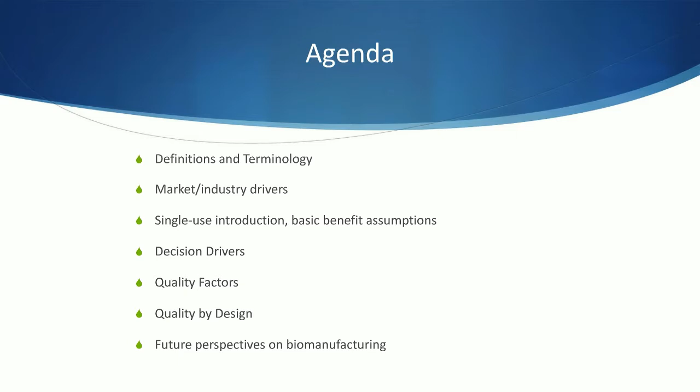This webinar is going to be focused on biologics processing, or bioprocessing as it's commonly called. It will look at the market and industry drivers for selection of suitable bioprocessing systems, and it will also look at the quality factors. This slide shows our agenda for today. We plan to speak for about 25 minutes each and allow about 20 minutes for questions. By the end of this webinar, we hope to achieve these learning objectives. If we don't cover a particular aspect that you're hoping to hear about, we don't want you to be disappointed, and we can cover it in the questions at the end.

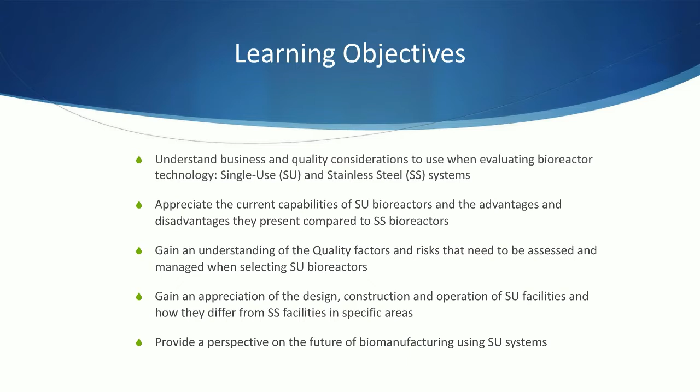We are seeing a growing requirement related to integrated process solutions, meaning a shift from equipment or unit operation-centric solutions to a more comprehensive, process-centric solution. There is a demand for new production and purification methods for many of the new emerging therapies. Data transparency and availability is becoming essential to manage a broader supply chain, particularly for those associated with single-use technologies, and also for extracting the most value from the bioprocess itself and achieving operational effectiveness.

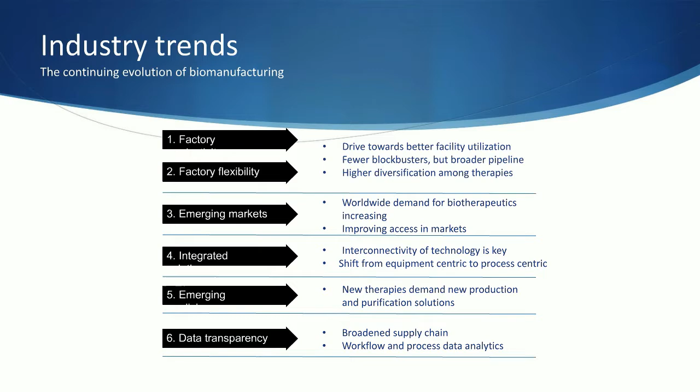These drivers boil down to three primary elements: drivers that address patient and shareholder values, increasing drug success rates, reduction in time to market, and keeping production costs as low as possible without sacrificing quality.

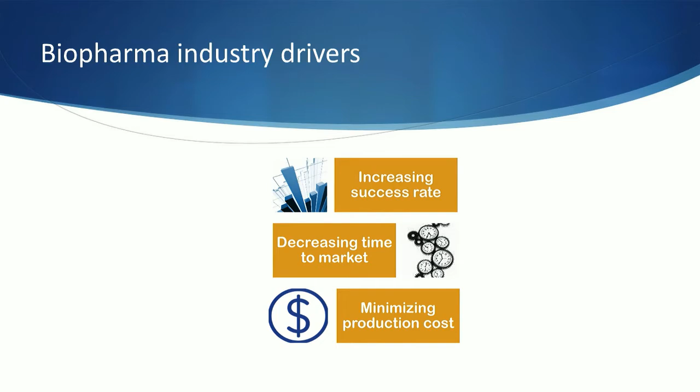Single-use technology, including single-use bioreactors, helps improve productivity by becoming more flexible and capable of supporting multi-product manufacturing more easily, which increases utilization rates. New processing methods, such as process intensification and continuous bioprocessing, have the potential to increase those rates even further.

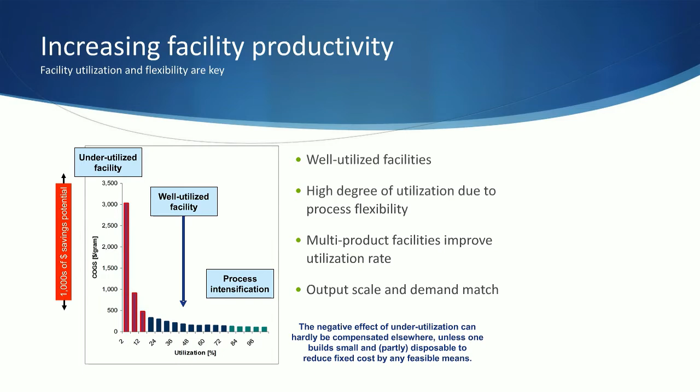For our discussion today, we want to outline the type of manufacturing scenario we'll be referencing. It's a manufacturing scale, either clinical or commercial, in a greenfield facility, not a retrofit. Stainless steel bioreactor capacity to 10,000 liters, and single-use to 8,000 liters, comprised of 4 by 2,000 liter single-use bioreactors and conventional downstream. Although we've used this as the representative scenario, much of what we present will be applicable to other scenarios as well, so please keep your particular scenario in mind as we go through this presentation.

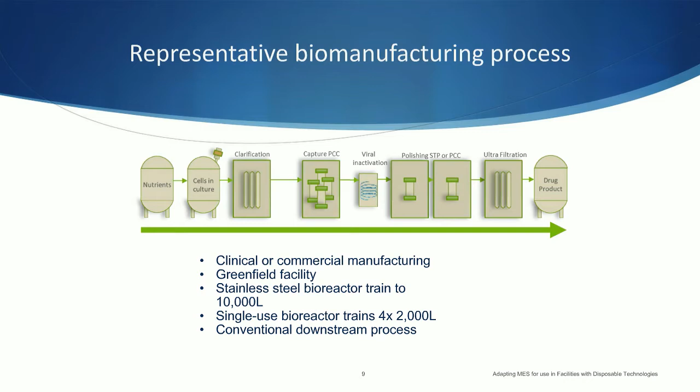Having been involved in stainless steel equipment, including bioreactors, I find it useful to compare the two technologies side by side as shown here. For our scenario today, the two 5,000 liter stainless steel bioreactors on the left and much of their associated piping are being compared to 4 of the single-use 2,000 liter bags and vessels shown on the right.

Let's make 3 key comparisons between the bioreactor types. Manufacturing scale stainless steel bioreactors have been and continue to be engineered to order, customized to meet the unique production requirements within dedicated single product facilities. Single-use bioreactors, on the other hand, are comprised of 2 complementary pieces: the hardware, including the vessel or bag holder, and the bag itself. Single-use bioreactors from the primary suppliers have been built as product platforms. These platforms accommodate changes, particularly in the bag, to address different processes. Change the process, change the bag.

Consumables normally associated with stainless steel bioreactors include inlet and exhaust filters, elastomeric tubing sets, and process probes. Likewise, single-use bioreactors employ similar components. However, the quantity and complexity of the single-use assemblies increases substantially as they become the replacements for the vessel and fixed piping of stainless steel bioreactors.

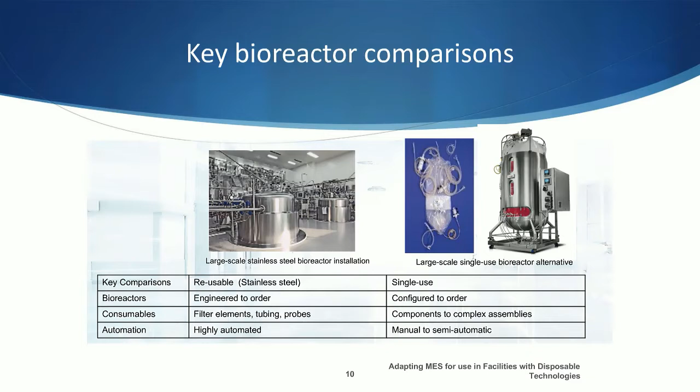Last among the key items, and not to be overlooked, is automation. Automated valves and position indicators are quite common in stainless steel bioreactors. Conversely, single-use bioreactor bags with their ports and tubings rely on manual pinch clamps, which puts more emphasis on the automation platform to guide operators' actions and receive acknowledgement those actions have been taken.

Within the context of Industry 4.0, the digital collection and management of this data is essential in making ongoing improvements.

Now, back to Trevor. Thank you, Ken. Yeah, thank you for setting that scenario and the comparison.

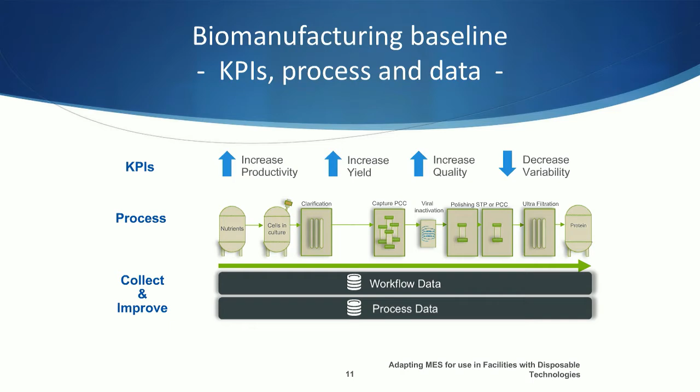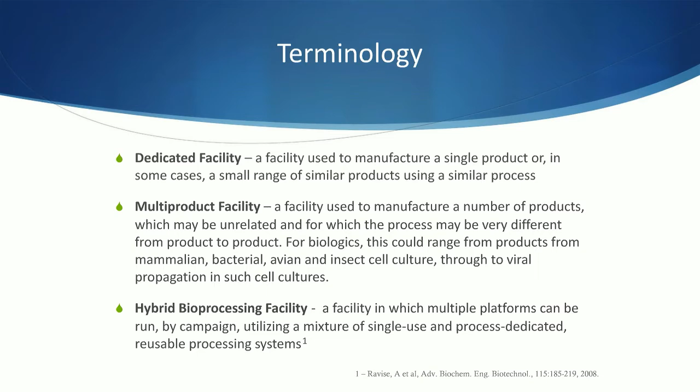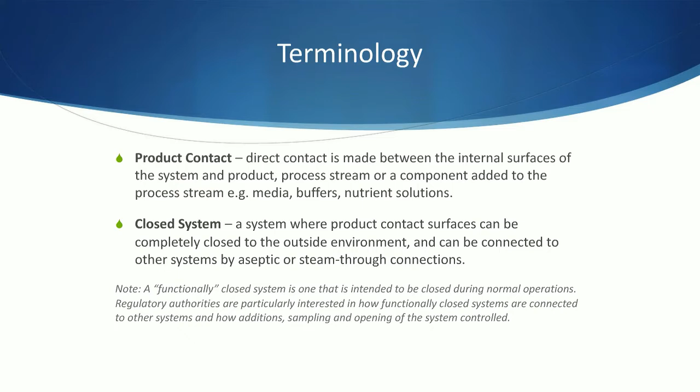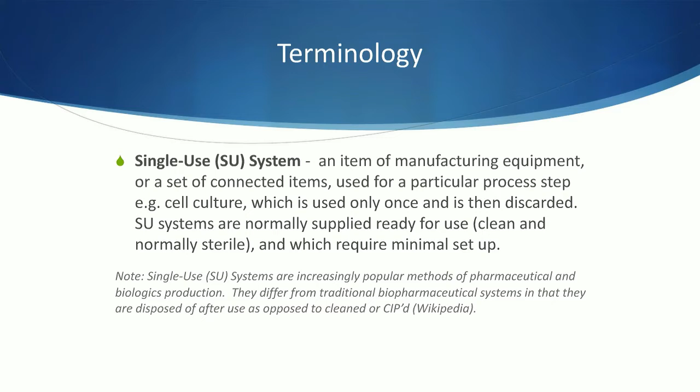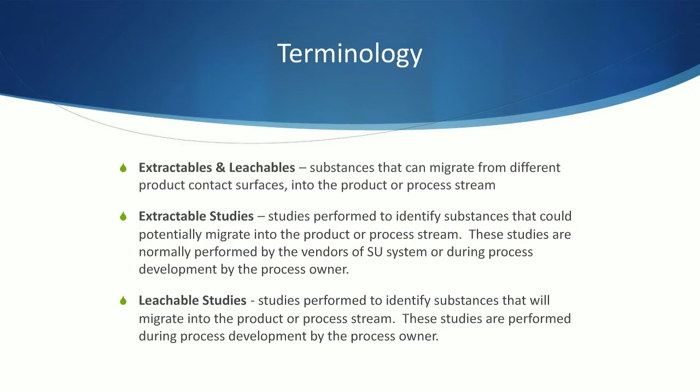We can't afford to ignore quality, and in bioprocessing there's no reworking. Reprocessing has to be strictly controlled and fully validated. I'm thinking of things like refiltration and repeating a chromatography step, which are both considered as reprocessing by the regulators.

Bottom line, there's very little room for error in bioprocessing. If you make a mistake, it can be costly. For example, if a cell culture gets contaminated, the batch must be discarded.

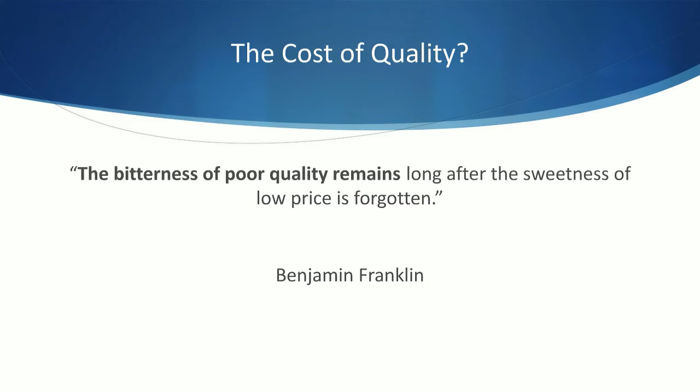So it's worth taking a look at the historical situation before the explosion of single-use technologies in bioprocessing. At the beginning of the millennium, the only single-use systems in common use in GMP bioprocessing were disposable filters and bags for buffers. Sometimes these disposable filters were used multiple times, such as air vent filters and sponge filters, which could be used on multiple occasions.

100 litres was considered about the smallest scale for mammalian cell culture for phase 1, the first point at which you need GMP material. Quite often, the process had to be scaled up for phase 2, and then again for phase 3 and commercial production. By the time you get to phase 3, you should be at your commercial scale.

The result was stainless steel bioreactors with many feet of piping, supplying water, gases, and nutrients, supported by extensive media and buffer preparation facilities and storage plants. These facilities were often dedicated because of the regulatory hurdles required to show decontamination and the time taken for product changeover. They were uneconomical, requiring a lot of risky capital investment at a very early stage of product development, when companies don't want to spend that kind of money.

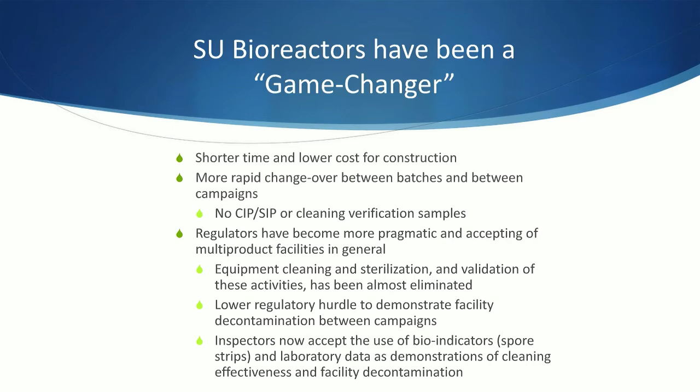In order to make a well-informed decision about system selection, we need to do some very early assessment of our process. We need to know that the process can be run and is scalable in the system we wish to select. Not all cell lines can be propagated or will express protein in single-use systems. So some very early design of experiments is needed, and it's something that most companies don't think about till at least phase 2 -- they don't want to spend money on design of experiments at phase 1. But the extent of the process understanding needed at this early stage is nowhere near as great, and it is essential for the selection.

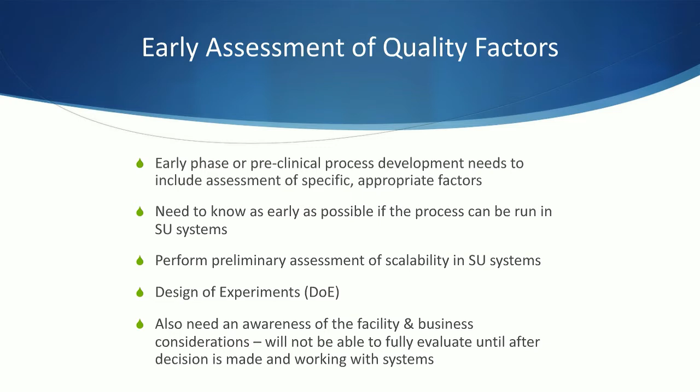It's time and money that's well spent, and it can result in a much greater cost and time saving if a single-use system can be used instead of a stainless steel system. So let's look in more detail at quality by design as it applies to the selection of single-use systems.

Oh, sorry, rushing ahead.

The cell culture process needs to be well controlled to ensure the best yield and the best product quality. It's well accepted that the control of critical process parameters is far better and more established in stainless steel systems than in single-use systems. With stainless steel systems, it's quite normal to have more mixing, aeration, and temperature control capacity than is needed. More work is required to evaluate single-use system capacity and capability, but the technology is improving, and with the development of jacketed single-use bioreactors and improved agitator design and sparging, it's starting to happen.

Either technology will allow pooling of the harvest from multiple bioreactors, and this allows scaling of the downstream process without having to change the upstream process. However, remember, stainless steel reactors require a much larger footprint, and for these systems it's much more efficient to increase the size of the bioreactor rather than the number.

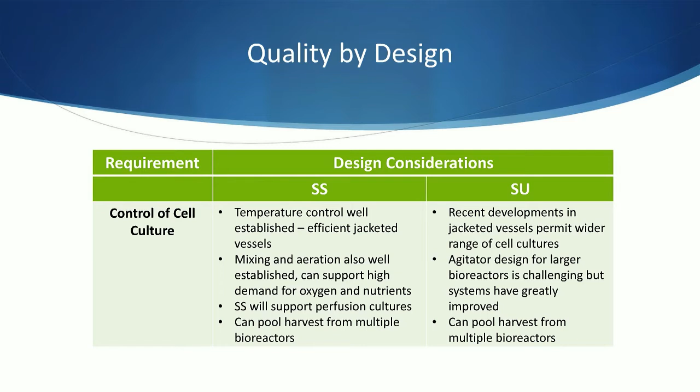Single-use systems offer almost no opportunity for cross-contamination. This isn't the case with stainless steel systems. In stainless steel systems, there are more opportunities for microbial contamination and inefficient cleaning. These include large piping runs that have bends and dead legs, elastomeric seals to which proteins love to stick, and tanks that have spray ball blind spots. Spray ball coverage is an important criterion for qualification of stainless steel bioreactors and tanks.

As we've already discussed, the greatest contamination concern for single-use systems is loss of integrity between leaving the vendor's warehouse and being assembled in the clean room ready for use. Integrity testing in situ is therefore of vital importance.

And on that note, I'm going to hand back to Ken.

All right, thank you, Trevor, for that discussion on quality by design. Let me get to, here we go.

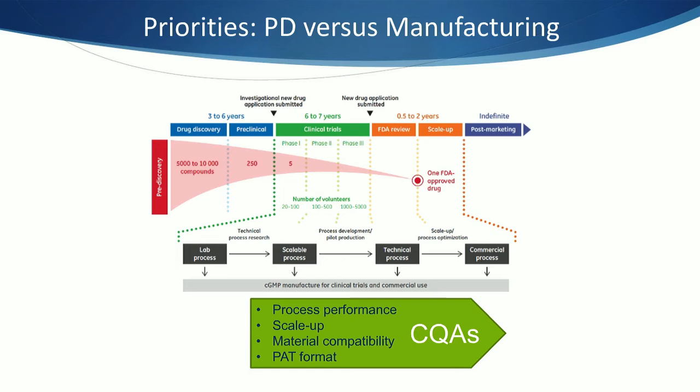Although this list may not be exhaustive, it does provide an excellent universal framework upon which to build a body of knowledge necessary to construct bioreactors of either type, stainless steel or single use.

Scale-up evaluation can be addressed using process modeling and simulation as well as actual small-scale process runs. The relationship between physical system features such as impeller diameter and type, sparger location and type, can be associated with specific performance parameters like power per unit volume, power number, mixing times, and mass transfer capacity. Using bioreactors of the appropriate sizes, the model simulations and relationships can be confirmed with trial runs in process development.

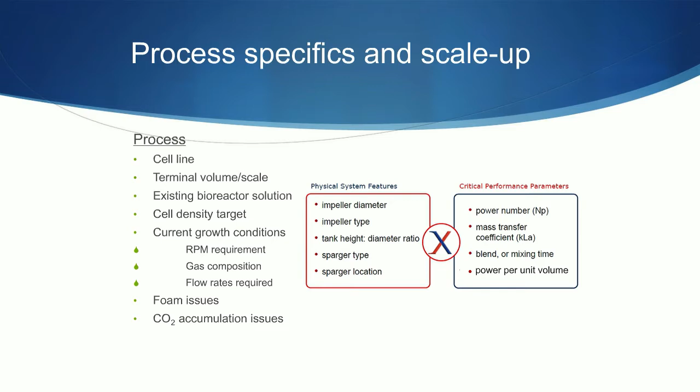Single-use bioreactor suppliers have expended much effort and expense to create product platforms capable of addressing the broadest possible range of cell culture processes. The bioreactor hardware and the bioreactor bagware must work in concert in order to perform in a way that is analogous to a stainless steel bioreactor.

Two design spaces exist, one for the bag and one for the hardware. The bag design space includes the film, weld-on ports, tubing, agitator drive interfaces, sparging elements, filters, and other similar bag-attached components. The hardware design space includes the vessel or bag holder, process measurement instrumentation, mass flow controllers, pumps for liquid management, exhaust filters, and condensers where applicable, among other things.

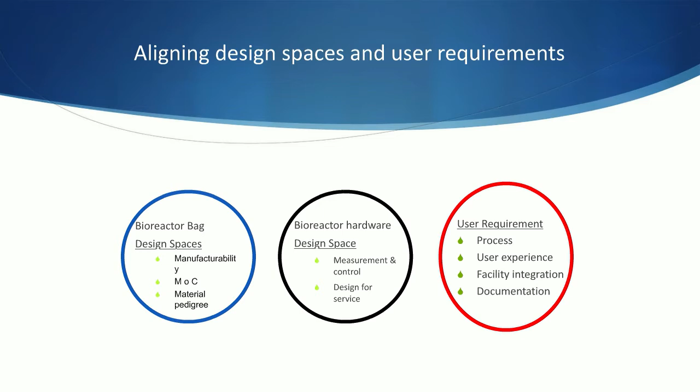The regions labeled D define what from the user requirements is not being met, and understanding this alignment is essential.

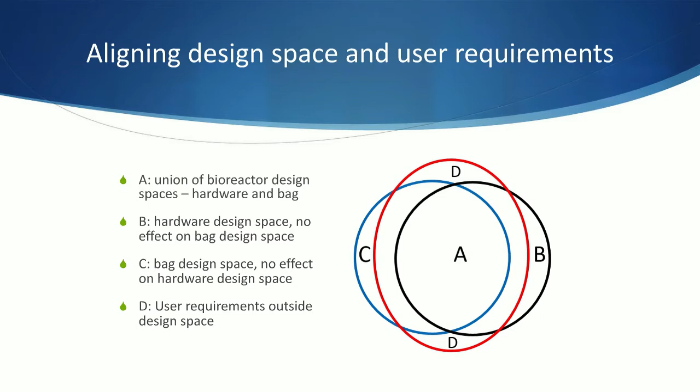With stainless steel bioreactors, there's a well-established body of knowledge about the common alloys used and their various forms, such as tubing, valve bodies, sheet material for vessel walls, etc. For such bioreactors, we have relied on metallurgists, and the lexicon has been defined by such terms as corrosion resistance, chromium layers, passivation, and rouging. Supply is ubiquitous, nearly universal, and distributed, establishing independence between bioreactor supplier and buyer.

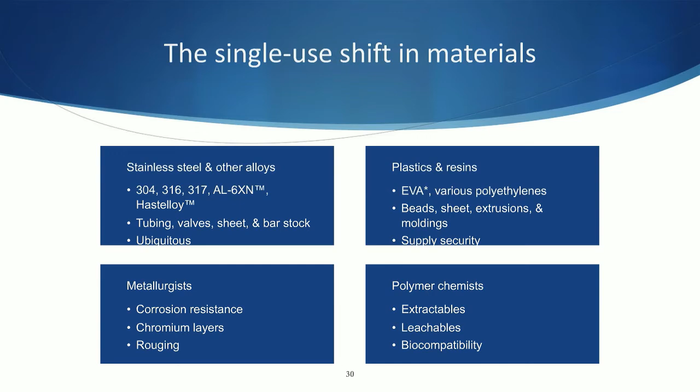In single use, however, we now talk about plastics and resins, and by analogy, plastic forms that include beads, sheets, extrusions, and moldings. Polymer chemists have taken the place of metallurgists, and extractables, leachables, and biocompatibility define a new lexicon. Unlike stainless steel, single-use security of supply takes center stage because of how sourcing and the supply chain is structured. Single-use assembly suppliers and buyers are linked as never before. Biocompatibility and supply must be considered early in the technology evaluation process.

Understanding which measurements are not required at the manufacturing scale is equally important. This is true for both stainless steel and single-use bioreactors.

Single-use bioreactors introduce a new probe or sensor form factor, that is, sensors that are welded into the bag and gamma irradiated as part of the bag's manufacturing process. These are ready to use and do not require autoclaving or insertion, unlike their reusable counterparts. In some cases, these weld-in sensors employ sensing techniques that may differ in range, stability, or accuracy from their reusable equivalents. These factors must be considered when deciding which sensor type to use.

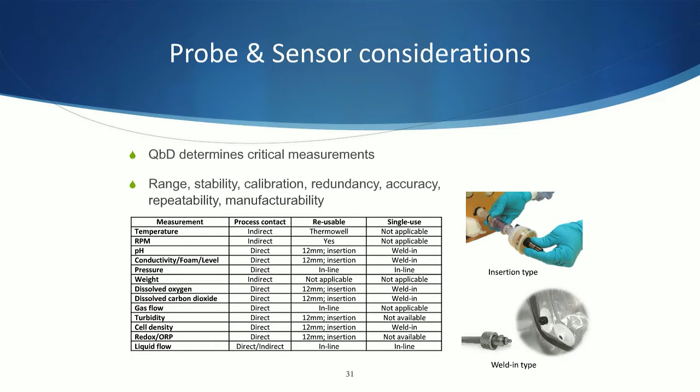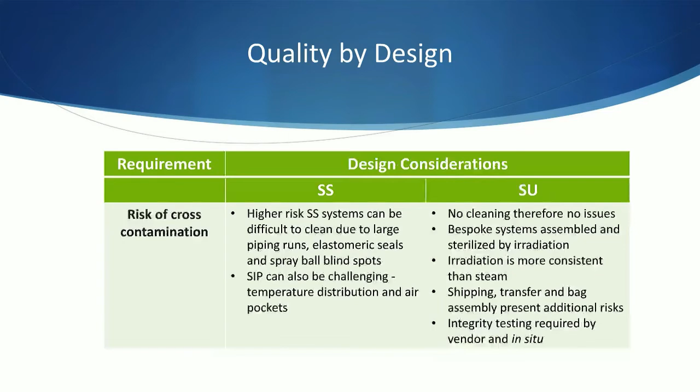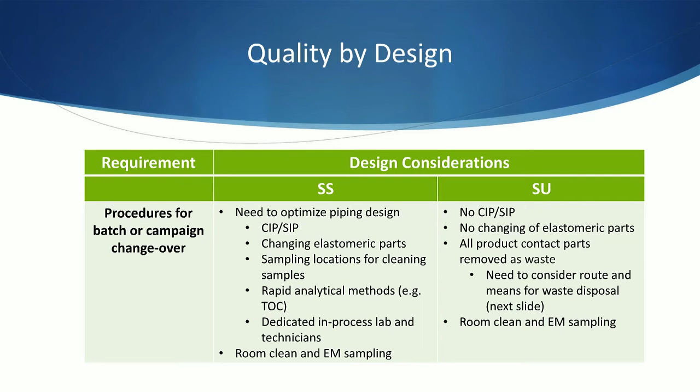However, for single use, one of the big considerations is removal of waste, because there's a lot more waste. And that's covered on this next slide.

In order to minimize the risk of cross-contamination due to waste disposal, the waste disposal procedures need to be qualified. You can't really validate them, but you can qualify them and control them. This is becoming the industry norm, and regulatory inspectors will expect it.

For stainless steel systems, the validation challenge is generally simpler. The main concern is liquid waste, which is run to a kill tank and then decontaminated by heat treatment. It consumes power, but it's controllable.

For single-use systems, the bag needs to be taken out of the clean room and either autoclaved before sending for incineration, or simply bagged up as hazardous waste and incinerated. Autoclaving requires validation, and if the bags are large, with large agitators, the autoclave needs to be large.

Removing hazardous waste is much simpler, so simply bagging it up as it is and taking it out the clean room straight to incineration is by far the easiest way to get rid of the waste.

However, whether the bag is autoclaved or not, there needs to be a unidirectional flow of materials into the clean room and of waste out of the clean room to avoid the potential for cross-contamination. Unidirectional flow requires a larger clean room footprint, but it's strongly advisable because it's much easier to control and qualify.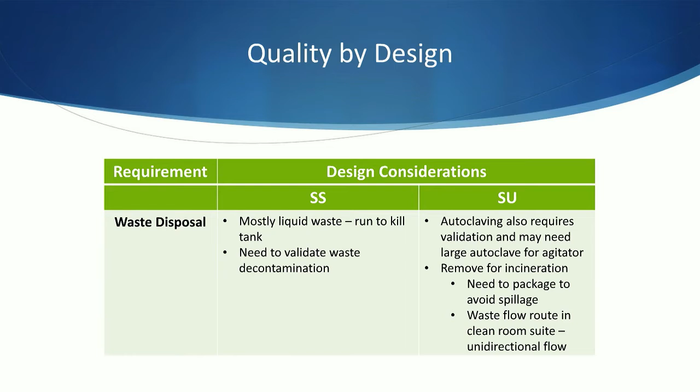Leachables from stainless steel systems are not generally considered a risk to product, although stainless steel systems will rouge and passivation is needed during commissioning and periodically thereafter.

Main concern for stainless steel systems is clean in place reagents. There's also a risk that these can cause inhibition of microbial cell cultures. Therefore, the validation of the CIP cycle has to also demonstrate that the rinsing will remove cleaning reagent residues.

For single-use systems, we need to understand what is going to leach into the process stream. And as has already been mentioned, this is a job for the process owner. We need to understand what the impact of those leachables might be on cell propagation and protein expression.

At this stage, we are far less concerned about the leachables getting into the final product. But during downstream processing, we need to understand the toxicity risk of the leachables if they do carry over into the final product. We also need to understand if they will interact with the product and impact product stability. All of this is part of the early phase design of experiments that we referred to earlier, and it's essential prior to selection.

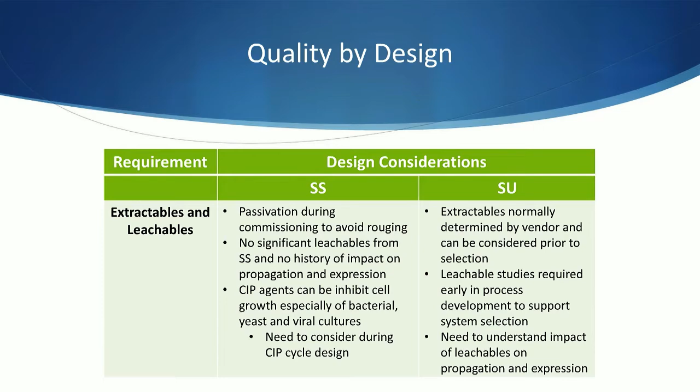We'll go back now to where we should have been when Ken finished speaking. Oh, here we go.

So now let's compare some of the business considerations between stainless steel and single-use systems. Cost is always important, and the comparison here is between high capital costs for equipment and utilities, qualification and validation of stainless steel systems, and the high cost of usage of utilities as compared to the high cost of disposables for single-use disposable systems. The bags themselves are expensive.

There are many cost comparisons in the literature. They include comparison of bag changeover times and other factors, but none of them that I'm aware of has included a comparison of speed to market, and that is a very important cost consideration. Time is money. You can get to your first GMP batch and scale up far more quickly using single-use systems. You can save valuable time when developing new products.

The smallest footprint of the single-use systems also provides significant cost benefit. Single-use systems are clearly more flexible, primarily because you can run multiple types of cell lines and scale up all in the same suite on a campaign basis. So you don't need as many facilities or as large a facility.

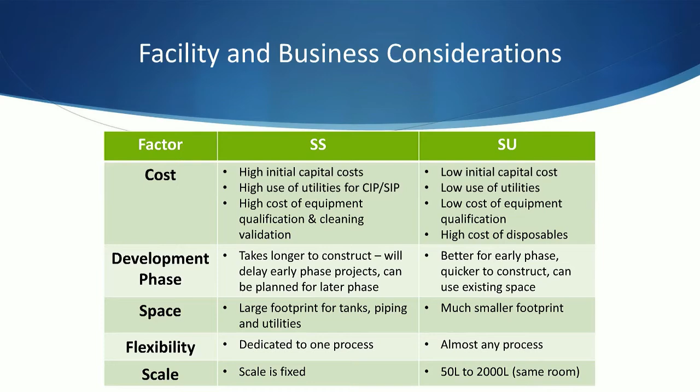So we've talked about quality by design, but this slide provides a high-level comparison of the quality considerations for single-use and stainless steel systems. Bioreactor integrity is one of the most important quality factors, and the methodology for demonstrating bioreactor integrity in stainless steel bioreactors is far better established. We can assign very tight acceptance criteria for pressure hold tests. If the bioreactor is well sealed, it can hold a high pressure for a long period of time.

Bags cannot be pressurized to the same extent as stainless steel tanks, and the sensitivity of the pressure decay test is limited. Pressure losses do occur over time, even with intact systems, and each system configuration needs to be evaluated to determine what the acceptance criteria should be.

Vendors are responding to customer and regulatory demands for better defined methods, and there are some custom solutions out there, and the sensitivity is improving. This is something that you should discuss with the vendors and see what they have to offer. There's also a guidance document on single-use leak testing, and it's currently being developed by the Bioprocess Systems Alliance, which is an interesting body worth looking at.

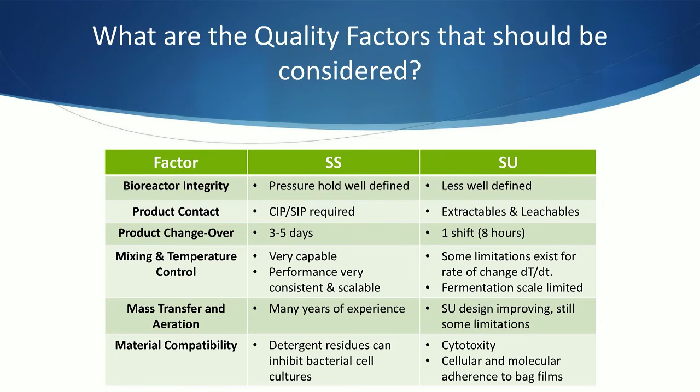Here are some further additional quality factors. The requirement for cleaning and sterilization comes up as a consideration again and again, and we'll expand on this later. The clean room design is heavily influenced by what needs to go into the clean room, and also by the type of operations that occur in the clean room. The clean room design for single-use systems is much simpler and less extensive, which is why it's quicker and cheaper to construct.

The probes and sensors that are used in the stainless steel system are not practical to use in the single-use system. Therefore, probes and sensors need to be specifically designed, and we've already heard about that from Ken. There's less experience with these instruments. They can be calibrated offline in situ, but they are different, and they will have some influence on the process control parameters. You cannot just simply transfer a process from stainless steel to single use or vice versa and expect that the measurements you're going to get are the same.

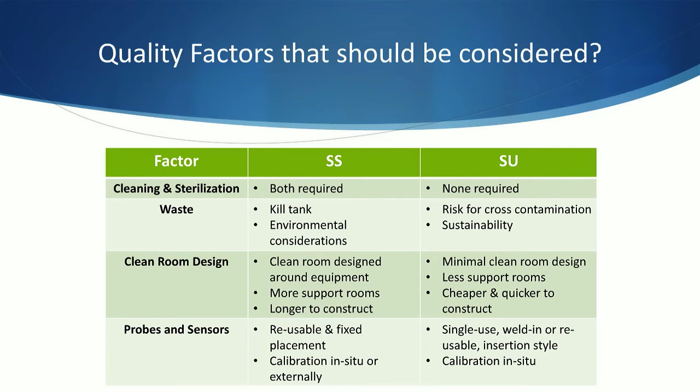There's an argument here for not changing between single use and stainless steel and just sticking with whatever system you've got and scaling up. Although I would argue that sticking with stainless steel is going to be a more costly option.

So that said, I'll hand back to Ken.

Good coverage on facility and business considerations, Trevor. Thank you. I'll continue here with some specific examples.

There are a number of technology-based changes associated with the facility, many of which Trevor introduced or discussed just a minute ago. And as this comparative representation depicts, the facility's footprint changes due to changes in bulk fluid management and the reduction or elimination of CIP and SIP requirements. Less obvious, though, are the changes in material, personnel, and waste flows throughout the facility.

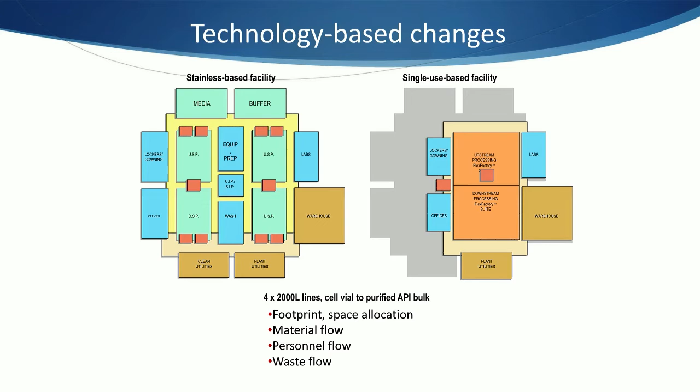Specifically related to single-use implementation, materials management, batch record composition, bioreactor integrity testing, as Trevor mentioned, and operation are highlighted here as specific areas to consider.

Material management is listed twice, once at the warehouse level, where bulk single-use assemblies are received from the supplier and stored. The second time relates to pre-manufacturing staging of the assemblies at or near the point of use. Batch records can also be considered part of material management, since the traceability of single-use components and assemblies is accounted for in the batch record, including rejected or failed assemblies and their replacements or substitutes.

For integrity testing, it will be critical to consider the value such testing might add, the size of the sample set necessary to establish relevant results, and the complexity of measuring temperature-dependent pressure decay in a container with elastic walls.

Operational automation considerations, where single-use assemblies are involved, relate to ensuring operational readiness and continuity, particularly where operator intervention is required.

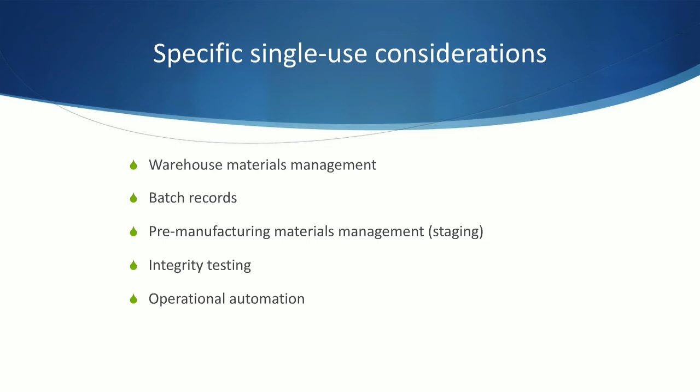Sourcing and procurement business functions act as the middleman between internal stakeholders like manufacturing and quality assurance and the suppliers in the supply chain. Sourcing and procurement must focus on supply security to properly support the internal business stakeholders.

The warehouse represents a transient location for single-use components and assemblies. The warehouse space allocation and residence time are dependent on how well supply and consumption rates are aligned and how risks will be mitigated using contingency planning. Contingency plans may include inventory levels, supplier-held inventory, as well as looking for alternative or backup suppliers where applicable.

Production planning dictates consumption forecasts, and consumption forecasts influence supplier lead times. Throughout this interdependent interaction, the security of supply must be robust and the chain of traceable material pedigrees must be unbroken. Linking materials in the warehouse to usage in the batch record comes down to how effectively the single-use life cycle is managed in the enterprise resource planning system.

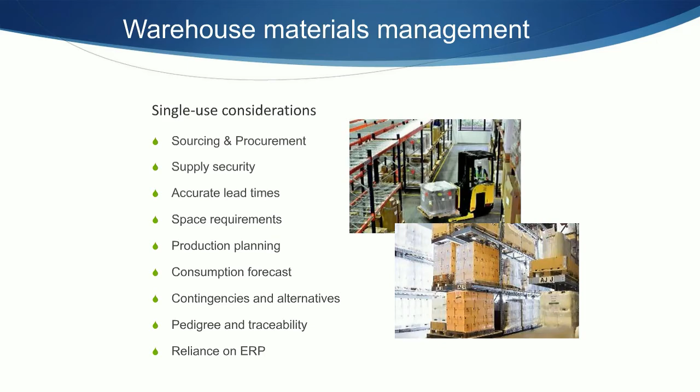To get an idea of the impact single-use products can have on building the batch record, here's an example of a single component. In this case, a filter cartridge sourced from multiple vendors.

The component document packages must include the same core content categories, such as material certificates, test results, and drawings. Within these records, however, the layout and presentation of the information may vary from supplier to supplier. Available formats and delivery mediums may include human and machine-readable options. Understanding what the suppliers provide and aligning that with your information management methods is a critical consideration for success.

For human-readable items, specific training may be required to avoid misinterpretation of variable content and layout between these types of documents. In all cases, however, linking the records and their information to the component item master within the enterprise resource planning system helps ensure accessibility, consistency, and compliance.

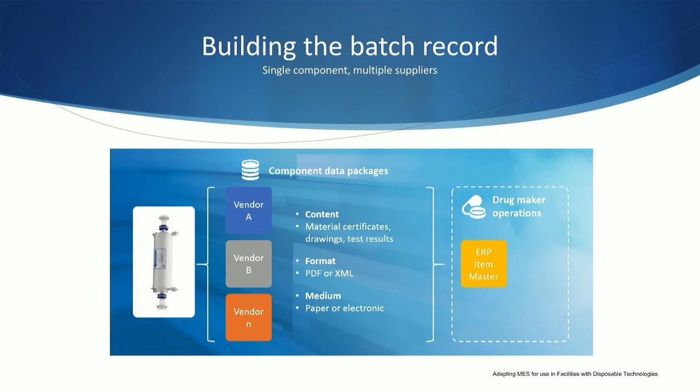Continuing to build the batch record concept a little bit further, here's a practical single-use bioreactor example. This includes components like we saw in the previous slide, plus single-use assemblies such as tubing kits, used for process connections between bioreactors or to bulk fluid management equipment. All the same comments about component data packages, content, format, and delivery mediums apply here too.

In this example, the situation is compounded by quantity and complexity of the assemblies. Dealing with rejected, failed, and substituted components and assemblies at the point of use impacts the manufacturing process tremendously. A proper, thoughtful consideration of contingency planning and the information management associated with this material flow is an essential part of the single-use life cycle management.

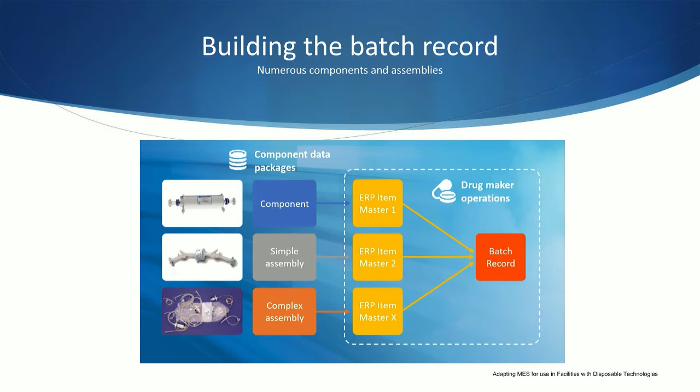Staging for manufacturing. Warehouses are rarely a good place to unpack and store unprotected single-use components and assemblies. Staging for manufacturing at or near the point of use includes many necessary steps, starting with unpacking.

After unpacking, temporary storage can be used to allocate and sequence the assemblies. The inspection step is performed to reduce the likelihood of certain visible defects making it onto the manufacturing floor. Visual inspection criteria should be guided by the supplier's knowledge of the product, specific operator training, and experience gained by the drug maker's operations staff over time.

The last step in the sequence is loading the bioreactor bag itself. Here are examples of top-loading bioreactor bag to the right and a waist-level bioreactor loading on the left.

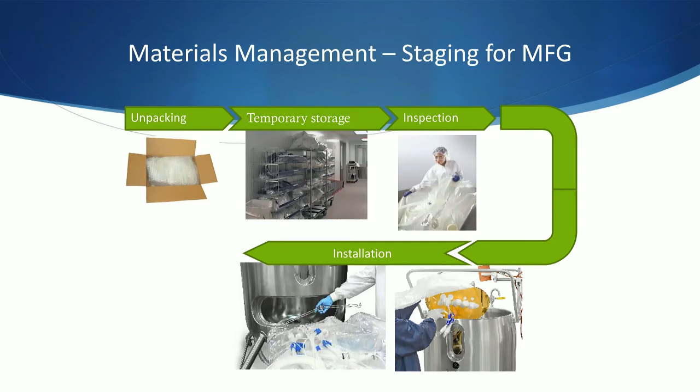Integrity testing is commonplace in stainless steel bioreactors, as Trevor said. It has become an active discussion topic in single-use bioreactors as well. On the left is a typical stainless steel bioreactor piping and instrumentation diagram. On the right, a representative single-use bioreactor P&I diagram. Construction and complexity differences should be clear.

Therefore, it will be important to consider the equivalent effective pressure boundary in the single-use bioreactor when looking to implement some kind of integrity test. And because the film and tubing on the single-use bioreactor bag are elastic, practical test methods must be established to attain useful results. Just like the visual inspection process mentioned earlier, collaboration with suppliers on this topic for recommendation and training is highly recommended. Accumulation of a large enough data set will allow periodic evaluation of the testing's effectiveness.

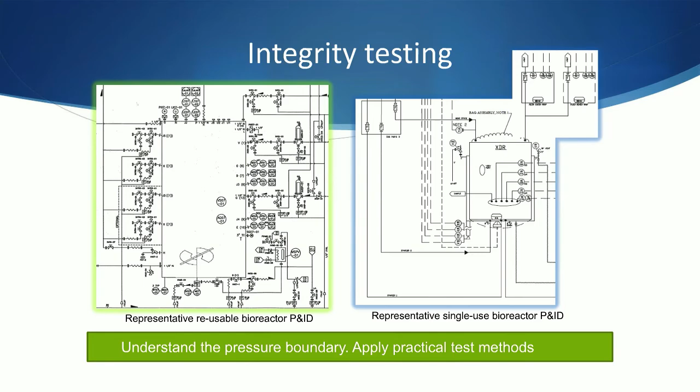Again, using a stainless steel bioreactor P&ID for reference, I've highlighted 4 addition lines and a sampling line. These steam-in-place lines include various combinations of manual and automated valves with weir type and radial diaphragms.

The equivalent line types are present also in single-use bioreactors, but without the valves and especially automated valves. Instead, such lines on single-use bioreactors routinely use pinching devices, and the pictures shown here are examples of typical pinching devices used for single-use assemblies.

Automation applied here to these devices on single-use bioreactors can improve process robustness by displaying procedural guidance, providing user prompts, and accepting acknowledgement that manual steps have been taken.

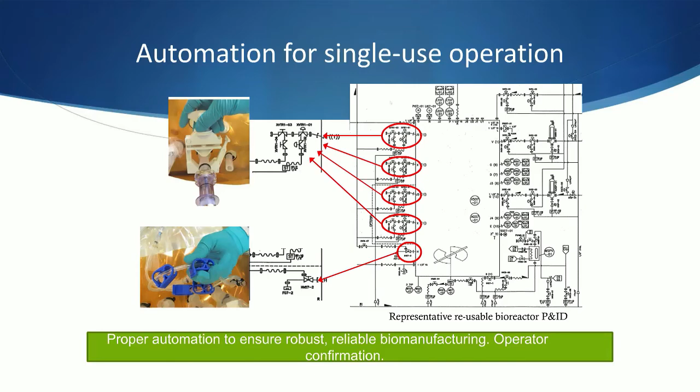To conclude this section, I thought it would be useful to compare agitator seal methods. The left-hand diagram is an excerpt from a stainless steel bioreactor P&ID showing a double mechanical seal. With it, there's a clean steam condensate seal lubrication subsystem.

The component count and complexity are extensive, and besides the high level of maintenance associated with such a subsystem, mechanical seals still do represent a potential bioreactor contamination source.

By comparison, the 3 images at the right show the elements that make up a representative single-use agitator and sealing mechanism. The magnetic drive head within the vessel opening is shown at the bottom. A cutaway of the impeller base placed on top of the drive head is shown in the middle picture.

And up top, a complete impeller assembly with the bag weld flange highlighted in red. That is what actually makes the seal in this case. This is a much simpler design, and it eliminates the contamination risk posed by the other design.

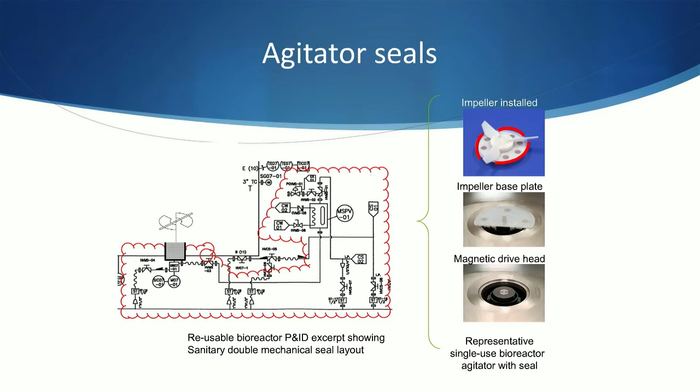Thank you very much, Ken, for describing some of the operational considerations. And now I want to consider the future.

The future bioprocessing facility will be a hybrid facility. It will most likely be a mixture of single-use and reusable platforms. For example, centrifugation still is a challenge for larger scale single-use, but where reusable equipment is needed, it will most probably be product dedicated to avoid the need for cleaning validation product changeover.

The ability to remove all the equipment from the room and fumigate will become standard practice, and clean room layouts will ensure unidirectional flow of people, materials, equipment, wherever possible. Such a facility will be capable of running any type of cell culture that you wish.

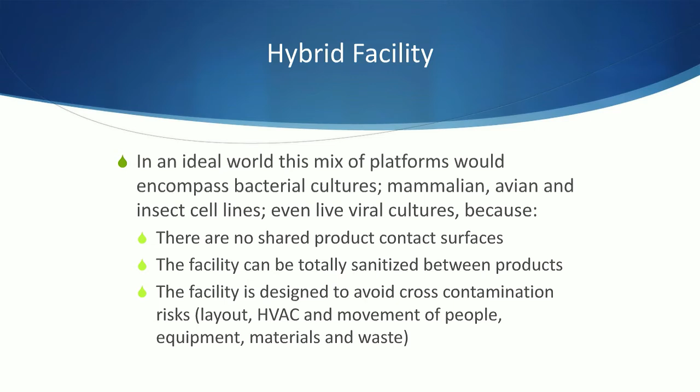The utopian view of bioprocessing is summed up in the next 2 slides. The progress that is being made with single-use systems means that we are moving away from uneconomical dedicated facilities. The meaning of multi-product facility is changing.

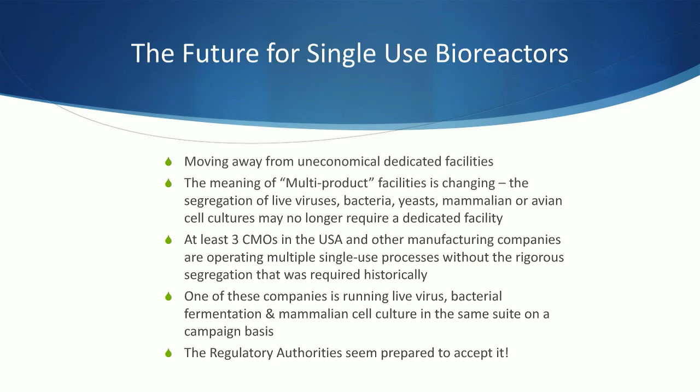At least 3 CMOs in the United States and many manufacturing companies are operating multiple single-use processes without the rigorous segregation that was required historically. One of these CMOs is running live virus, bacterial fermentation, and mammalian cell culture in the same suite on a campaign basis, and the regulatory authorities seem prepared to accept it.

We're now seeing that the flexibility of single-use systems is driving demand. This in turn is driving improvements and is encouraging companies to design larger scale single-use bioreactors. The combination of larger single-use bioreactors and higher yielding cell lines means that it's now possible to go from bench scale to pilot scale to commercial scale in single-use systems in the same facility.

If we can achieve this, we've saved an enormous amount of time and money during process and product development, and some companies have already started to realize these benefits.

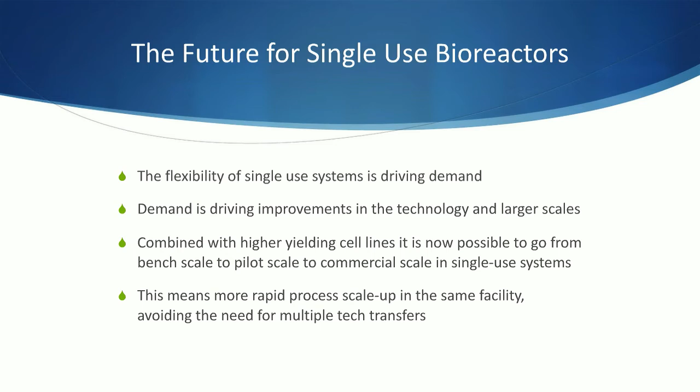Thank you, Trevor. Adding to Trevor's summary, we've covered a lot of material today. The benefits of single-use technology, including process flexibility, reduced cleaning needs, and the near elimination of contamination risk, are all reflected in better process economics.

Sustainability, too, is well accepted now that single-use technologies have been broadly adopted. However, some questions still persist, like standardization of extractables and leachables testing, supported documentation completeness, and how effectively to manage critical quality attributes as part of a single-use life cycle management approach, and what remaining regulatory challenges remain, or will there be, as we push the technology further.

However, we've presented some information we think you can use as you evaluate and implement single-use bioreactors and perhaps other single-use unit operations as well.

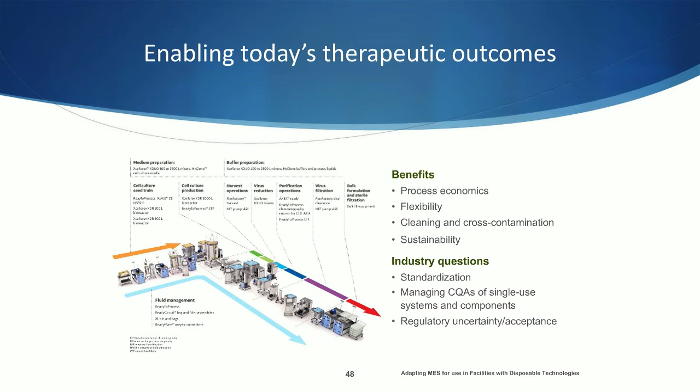Because of the importance of material management in single use, I wanted to be sure to highlight again how single-use technology increases the need for proper, adequate material management to support manufacturing, from the supply chain to the warehouse and from the warehouse to the bioreactor.

And material management is not only about physical logistics. Effective single-use material management must include integrated information management as well.

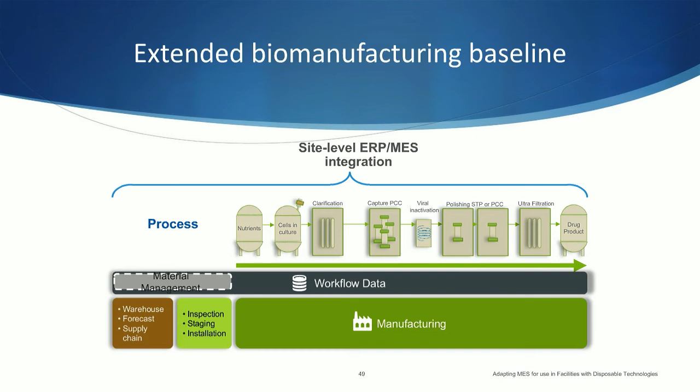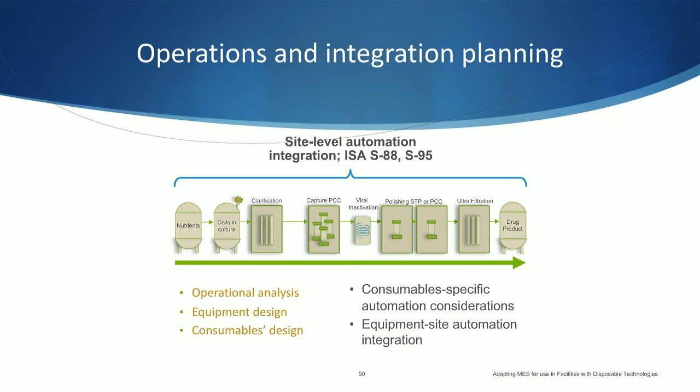Implementing single-use bioreactors and single-use technology more generally requires a thorough operational analysis performed by a cross-functional team. Aligning equipment and consumable design spaces with appropriate user requirements goes a long way toward building a robust biomanufacturing operation. Single-use specific automation increases robustness even further. Site-specific equipment automation increases the availability of workflow and process data for use in continuous improvement activities.